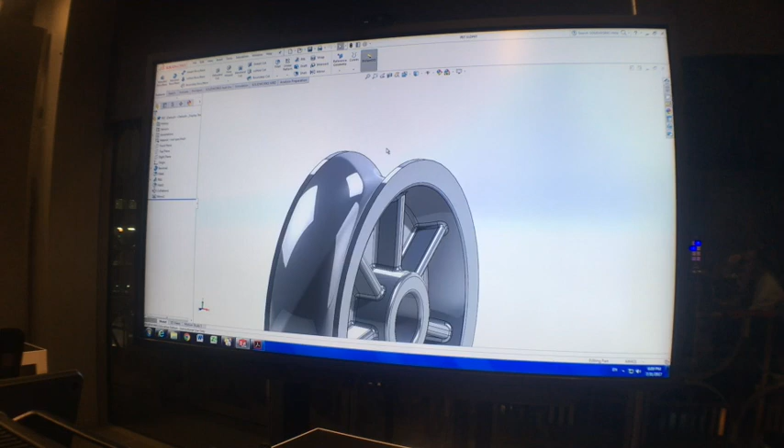So this is the finished part and what we were aiming for. One small detail left off is just a small fillet on these outside edges, 0.5 of a millimetre, but that's not crucial to the overall model. So I'm going to model this from scratch, including the sketch, very quickly.

If you see something on screen you're not sure how to do, yell out and I'll just repeat it, all right?

So start on the front plane, and I'll start with 2 lines and make them for construction. When I'm starting this bottom edge, I'm making sure that it's above that construction line because I want to leave a hole in the middle of my part when I revolve it.

I double click here, that ends that line, and then I can start a new line. And here I'm doing 2 circles, and then pressing trim to trim those away to create my overall shape. Then mirror, and dimension.

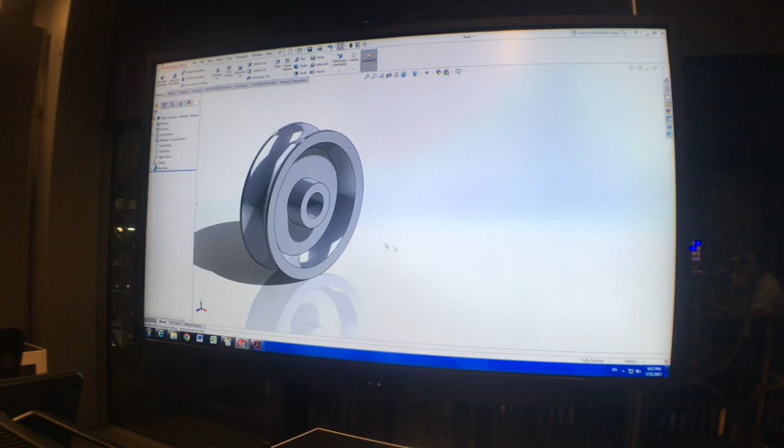Now I'm just going to do this without moving things around in the feature tree, so this is the correct order. So I'm going to fillet these faces.

I'm going to create a rib, which requires just a vertical line. If I want to fully define that, I need to add some dimensions in.

Remember, I want all of your sketches fully defined. So even a sketch like this should be a black line with some dimensions.

Hit the rib feature, 3 millimeters thick, 2-degree draft angle.

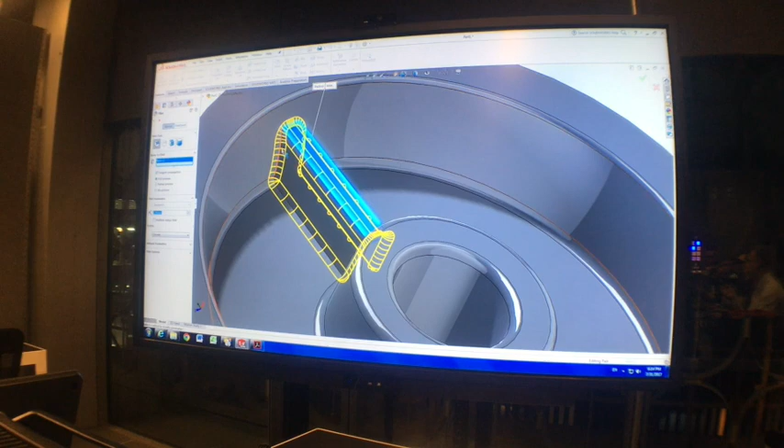Then when I fillet the rib, I'm just selecting this top face. When I select the face, it goes around all the edges of that face, and because of the curves on the shape here, that fillet, which is tangent propagation, propagates all the way around that.

Circular pattern. Pick the axis in the middle. Features is the rib and the fillet. Equal spacing to 7.

Right plane for mirror. Again, rib, fillet, pattern. I also need to check this box here, geometry pattern, to enable this to work. That's it.

Can you go back to the actual sketch of the rib? 9. Okay, cheers.

Any other questions on this one? Based on the responses, I should assume everyone's going to get this 100% right.

There was a radius you put on the outside of the wheel, right? Yeah, that's the fillet. This one here, just on that outside edge, 0.5 of a mil. 0.5, okay.

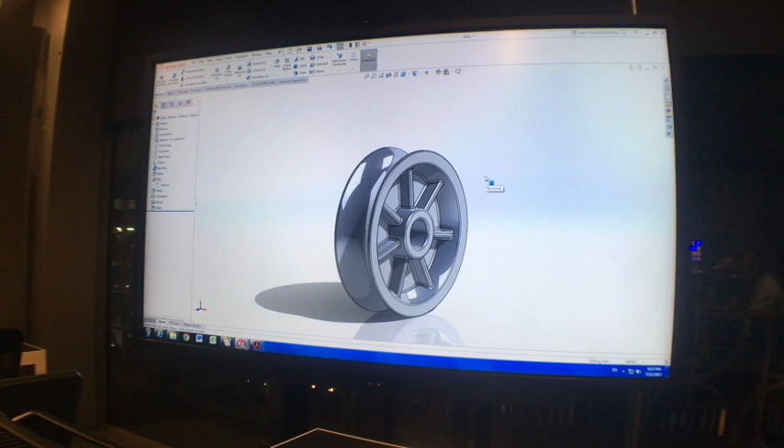So with the mirror, you select the circular pattern. Yeah. So I've seen this come up with a few people, so I'll just talk about that quickly.

When you're doing the circular pattern, what does the geometry pattern tick box affect? Why does that make it magically work? To be honest, I can't explain it. Just do it. Complicated? Yeah, this is very complicated. Google it if you really want to know.

I just want to explain something quickly with the patterns, okay? And it's the same with the mirror. So when I'm doing that circular pattern, you can see here, when I click on that rib, it gives me a preview, and that looks pretty close to what we're doing, right?

If I just tick that one, it's only including the rib feature, it's not including the fillet around the edges as well. You have to manually include that fillet feature here in the features and faces to pattern. So you've got to make sure you select that fillet as well.

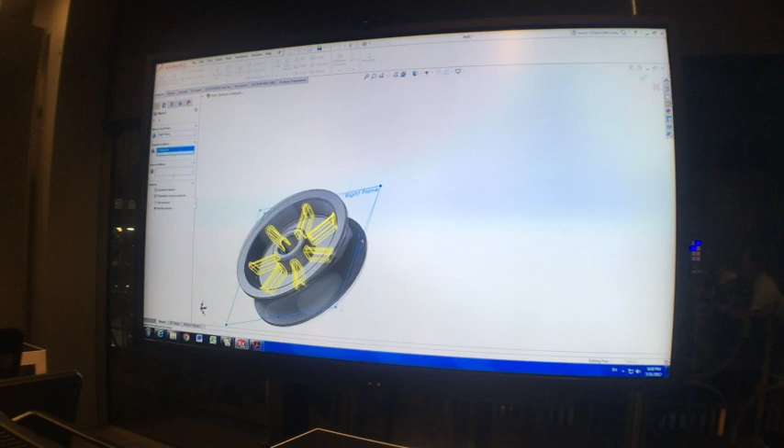It's a similar thing when you do the mirror. So when you do the mirror, all right, if I just select one of those patterned bodies or patterned faces, you can see the preview there, it's showing me the entire pattern, okay?

Now in this case, it's actually worked compared to bits earlier. Typically though, what you should be doing when you're doing that mirror is including the original feature as well. So you'd want to normally include that rib and that fillet as well as the circular pattern. Okay? If you're encountering errors, make sure you've got those 3 selected.

If we were to edit the original fillet and rib having not mirrored them, would that affect the drawing later on? Because you know how you mirrored just the circular pattern and it took everything with it. Is that why we needed to mirror the rib and the fillet as well? Let's test.

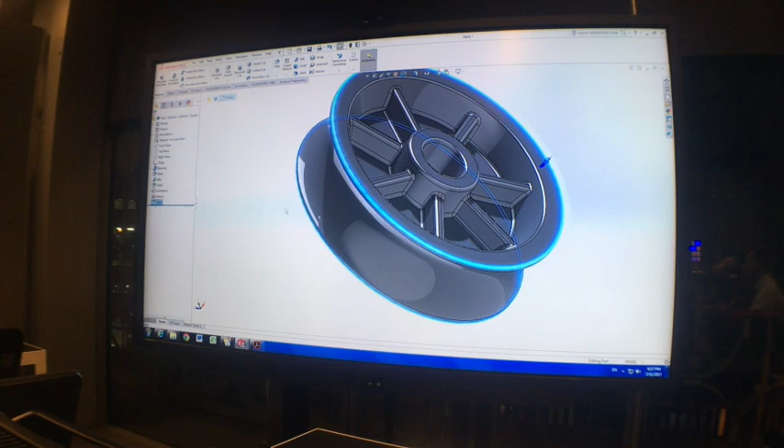Okay, so if we edit, basically what you can see is a mirror, which signifies that when I edit this fillet size, so let's go down to 0.5, that's going to be reflected on the other side, because it's derived from that. So even though it's not included in that mirror feature, you can assume, it's safe to assume that it will be.

Any other questions on this one? 0.45. Very good. 0.5 for what? The one on the outside? That outside one. 0.5.

Okay, so what we're going to do now, once you've done that part, I'd like you just to open all of your parts. Just have them open in SolidWorks. So, a few tricks just to move between files, or basically sorting through your interface, and shortcuts. We'll touch on some things now. When you're working with assemblies, it can be useful to have things open because it just makes it quick to insert. When you start a new assembly and you go insert part, anything that's open will already be there to bring in.

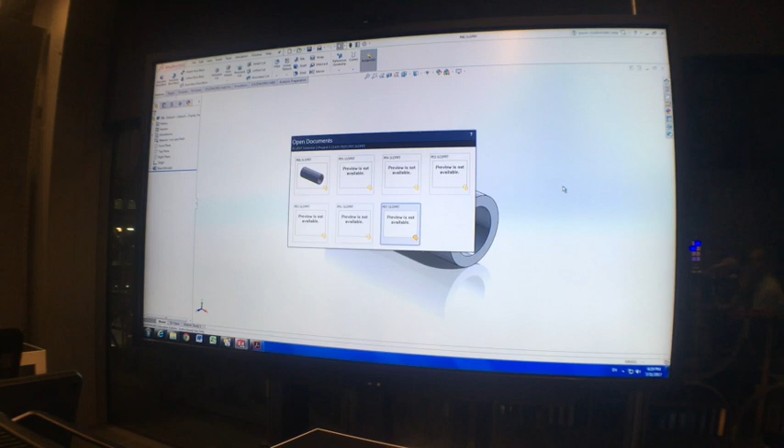So when you have multiple parts open, if you hit Control-Tab on your keyboard and hold down Control, you'll bring up this Open Documents window and you'll be able to cycle through. When you let go of Control, it'll open up that file. So that can be useful for moving between files if you're making changes. You can also, once you've hit Control-Tab and you're still holding the Control key down, just move with your mouse and click on one of those files.

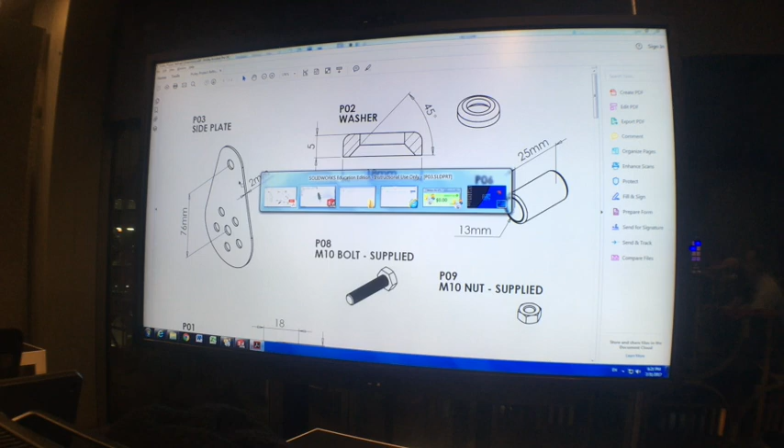So we go to that part, and if you've set up correctly with all your dimensions, there should be some things we can do pretty quickly. So here, that A to B, I can press in there, 76, easy, and the thickness, I can change that to 2. Now the holes, it's a little bit different. I can change this number to 5, but see how it's still at the top? I need to bring that around to the bottom. So for that change, I need to edit the sketch. If you want to edit a sketch that's in a feature, you can click on the feature in the feature tree and see this icon that comes up, edit sketch. You click that, and then you're editing that sketch.

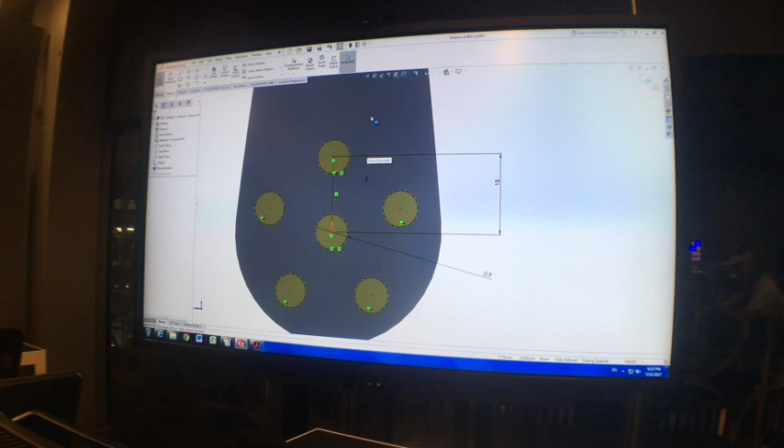Willie? What do I need to do to get that circle to the bottom? I don't remember how I did it last week. I think I got rid of the constraint that made it vertical and then dragged it around to the bottom basically. Yeah, he's spot on. So what's holding that circle up the top there is its dimension here, 15, and also that vertical relation. Now, it should still retain a vertical relation.

There's 2 ways of doing this. The first one is deleting that, moving this around to the bottom, and then adding it back. The other way is to delete that dimension, 15, and then you can actually drag it through and out. Either way, same result, same number of clicks. So you want to move those holes around to get that hole at the bottom. Okay. All right, it's good. Save.

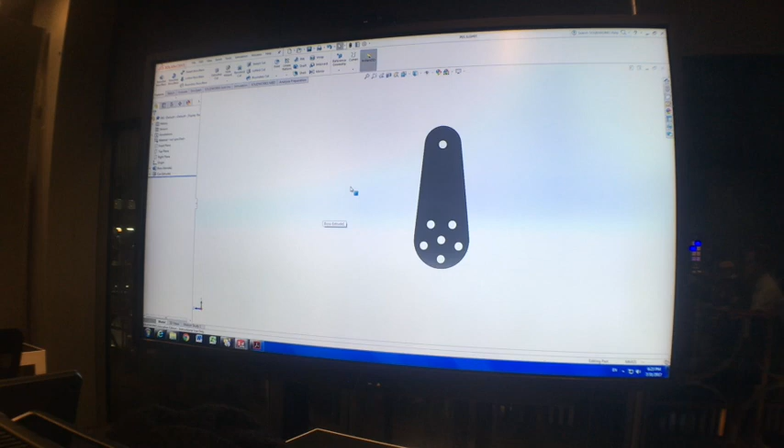Could someone else point out something for me? Chris, while we're on that side plate, the radius of the bottom large circle seems a lot larger. Yeah, you are correct. But I can't find anywhere else on the document a dimension for that. No, it's a good point. Okay, let's make it bigger. Let's go 80. The wheel is 76.

Yeah, you're pretty smart, aren't you? It's good. It's good.

Okay, Zach's made that diameter at the bottom 80. Right now that looks wrong, but I need to update the rest of the proportions. I know the 76 is right here, and we've got the 80 at the bottom right. So perhaps the top might need to be a bit bigger, perhaps the hole spacing needs to be bigger, perhaps the holes themselves need to be bigger. There's a few different things you can do that might affect how it looks.

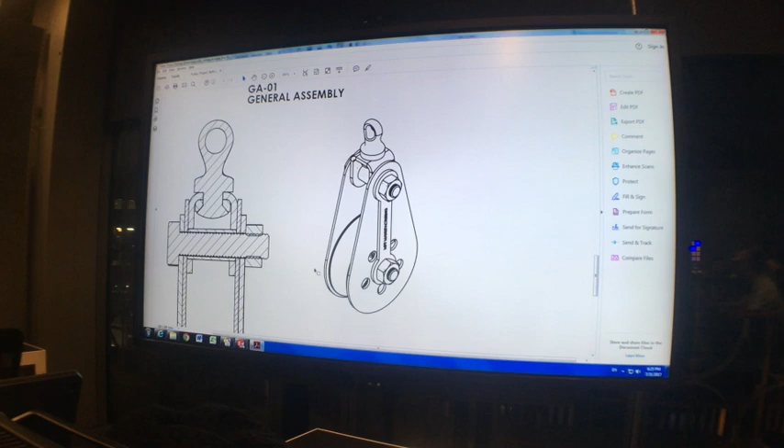The other thing that I think Zach's probably done is had a look here at this, and you can start to see the proportions of one part relative to another. If you know the diameter of the wheel is 76, and that's smaller than the diameter of this part on the outside, then it obviously needs to be bigger than that, doesn't it? Yeah, so it's really good.

Okay, what's next? Someone else? Something that's different, there's a chamfer or this fillet one on the washer. There's a round fillet, and then on the bush there's also, it looks like there's a fillet.

We'll do that one, that's pretty easy. The one on the washer, you're right as well, there is a fillet on that, we'll come back to that one. So the one on this part we'll come back to, leave that for now. But on the bush here, we can add a fillet.

So 1 millimeter outside surface, okay. The other thing on this, it's got a width of 25, so we can update that if you had 30 like me. Save that. All right, anything else?

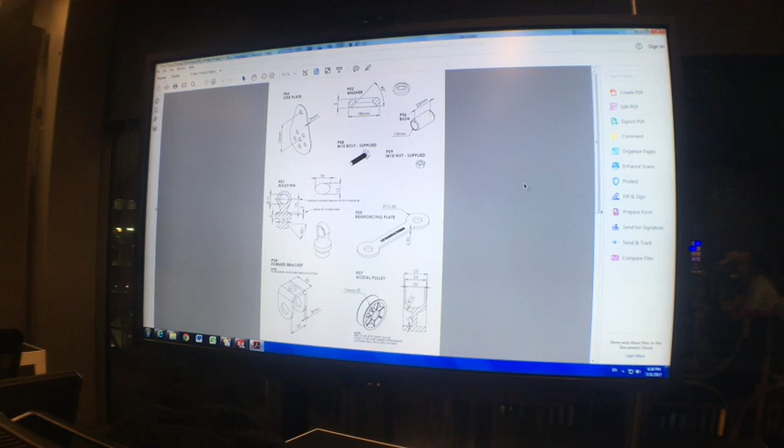All right, the main one that someone should have picked up is that this one's got text cut into it. Not quite off center, on center, but we're going to do that detail now. It's also got this dimension here, 12.5 for that radius and 2.5 for the thickness, so we'll put those in as well.

So that 90, that's changed to 76. Diameter, what did I say? 25, yep. The thickness, 2.5.

Okay, so on this one, what we have is some text engraved, all right, CLB, my initials. When you do yours, you can do your own initials, you can do your own brand name, whatever you want. Just don't do CLB manufacturing - let's see who's listening to my instructions.

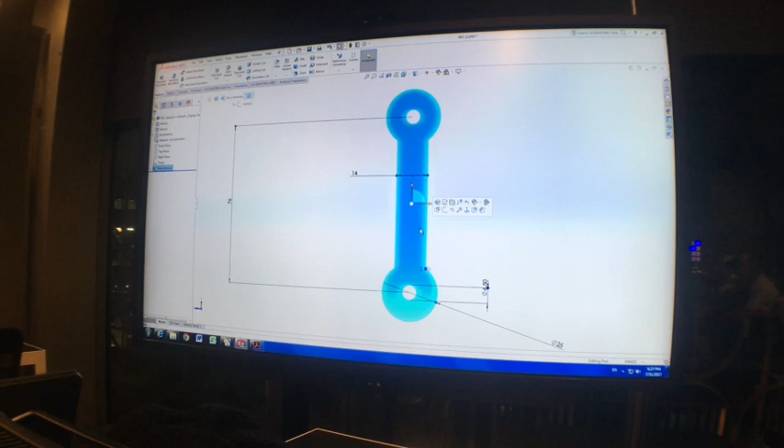So to do that text, it's just a sketch, all right, and there's actually a text tool. So we start a sketch on this face, and the text tool you can see up here says text. I'll show you how that works. So I'll click that text tool, and what happens is, in the text here I can type in, and you can see in my viewport that that text has gone to the origin. By default it will go there.

What it's really good at though is going around curves or edges or lines. So if I wanted to do text around a curve, I can select the curve here, and you can see that text will actually follow that curve. Now you can edit the direction of the text by pressing these buttons - I can flip the side the text is on, I can flip the direction the text is going, I can make the text justified or centered.

So if you're trying to make a clock, for instance, you could just have a circle there and your numbers, and just justify them around a certain arc. So there are easy ways to set those sort of things up.

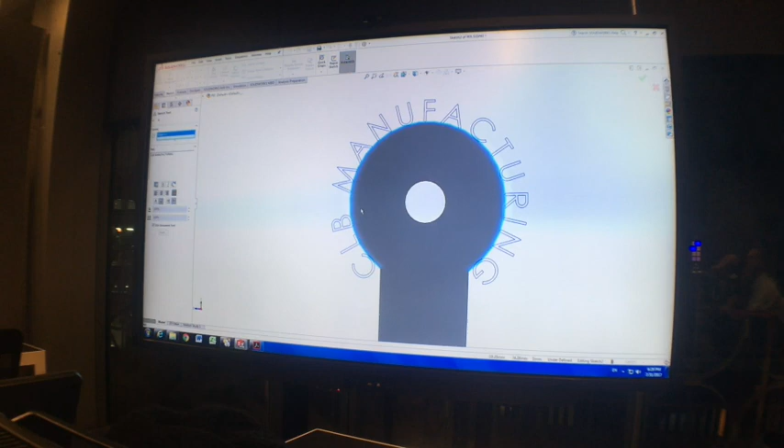What's important to note though, when I have something like this, when I'm using this text, the normal rules apply when you're trying to do your extrude or cut - you don't want lines crossing over each other. The one thing with text is you actually can't trim them, so even though it's blue lines there, you can't actually trim away like you could in Illustrator, those little sections. So if you are using text, you need to make sure that there's no overlaps, to use them properly when you want to do a split line or a cut or an extrude.

Now we want to have this in the middle of our part. What it doesn't say here, but what I'll tell you is the text is 3 millimeters high, so we want it centered in our part and 3 millimeters high. I'm just going to press the tick on that one, leave it for a second - to come back and edit it, I'll double click it later, but just press the tick and it'll stay there. I'm going to add a construction line up the middle.

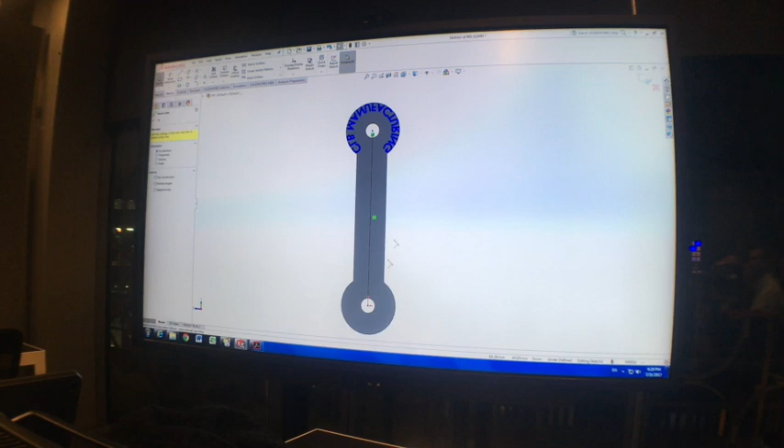I'm just going to add another construction line, which goes from here to here, next to it. And what I can do here is put a dimension between those that's 1.8 millimeters, which will give me a baseline to put my text on.

Alternatively, you can do this without the line at the middle and just dimension it from the origin.

So once I've got a curve there, I can double click my text, and where I've got the edge selected here, I can delete that and select this new line. Just going to center my text, flip it the direction so it's around the right way.

And then to change the font or the height of the text, I want to uncheck this box which says use document font. Press the font button. And then here, you can choose any font that's on the system. The only thing you need to do is make sure that it's 3 millimeters in height.

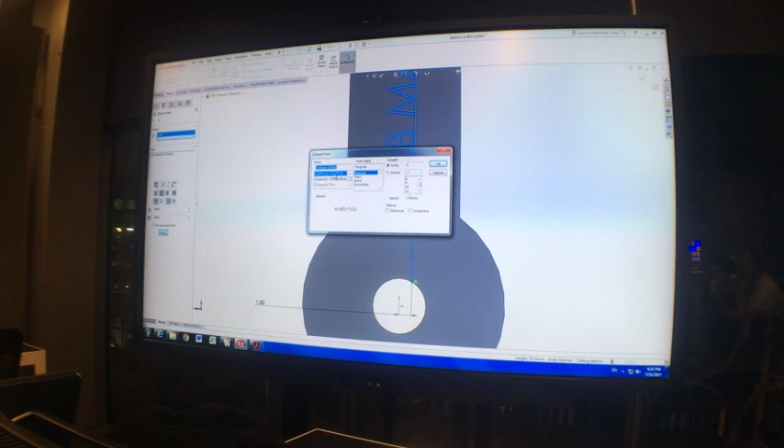So you can use any font you want, so long as there's no overlapping of letters. When you're happy, press OK.

And then go features, extruded cut. If it works, you should get the yellow preview. And when you cut, just make the cut 0.2 of a millimeter, like an engraving. Press OK.

And there is your detail. Now what you can see there, mine hasn't included that L, so I'm going to have to change the font. Go and edit the sketch. There's no particular reason why that one hasn't worked, but change it anyway.

Alright, there we go. And save.

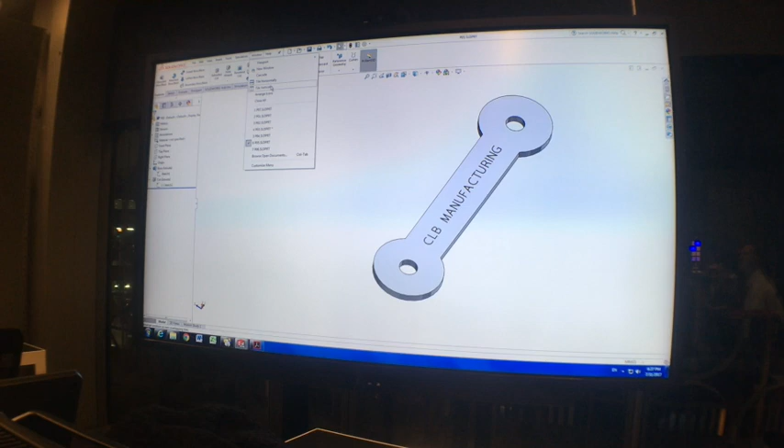We'll keep going now with some assembly stuff. So one of those other tools, once you have your parts open, is you can click on window and tile, and you can either tile horizontally or vertically, but that will show you all of your parts as well. It's not a very useful way of actually working, but you can then visualize what you've got open at the time.

If you want to increase the size of those, and let's say there are only 4 parts you're working on, you can minimize some, and once they're minimized and you press tile, it will just tile the remaining ones. Once you go full screen again, the rest will all go back to full screen. But the others, they'll remain minimized until you go through and cycle, get them all back to maximize.

There's also this button here at the top right of the viewport. Click to tile to the right or the left, where you can basically put one file, one part just to the right, and it'll show the other 2. So there's a few different ways you can play around.

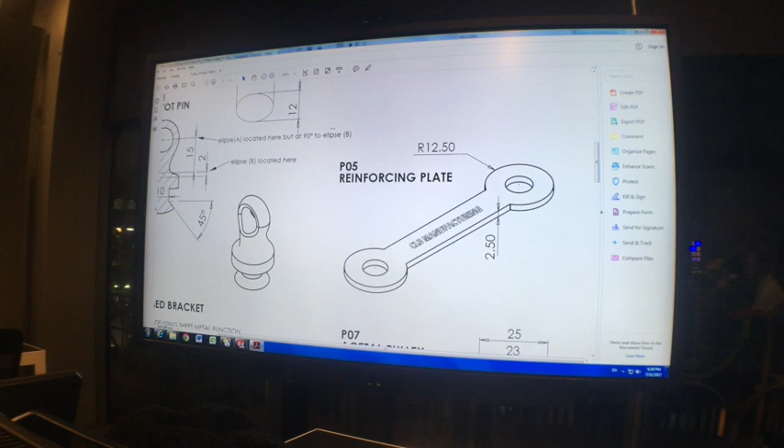So we're going to start with our assembly now. Have a look at our drawing here. We're going to start with this sub-assembly, which has those parts, 1, 2 and 4. And then we're going to create a new assembly and put that sub-assembly into the new one. But I want to make sure we all get the basics right first, with just the simple assembly to start.

When we're starting our assemblies, you always want to consider what's going to be the easiest way to get everything in there and aligned properly. So you typically want to start with something that's central to your assembly. If you're assembling a car, you wouldn't start assembling the whole car with a tyre and working out from there. You start with a central part, which might be the main chassis. So let's start with something central.

In this case, we'll use this formed bracket as our first part because it's symmetrical, right down the middle. It's got holes here on the sides. It's got a hole on the top for the pivot pin and a washer to align it to, and some flat faces here for later on mating to these side plates once it's in the general assembly. So that'll be our first part.

So what we're going to do to start your assemblies, there's two ways. You can go File, Make Assembly from Part, or you can go File, New, and Assembly. Press OK.

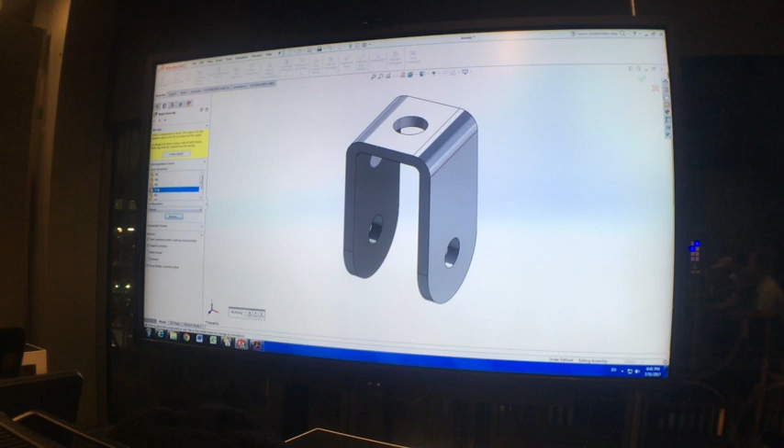As I said earlier, when you have your parts open in SolidWorks, you can see them here as parts ready for you to insert into that assembly. If you have nothing open, just press Browse and you can browse for your files, or you can click and drag straight from Windows Explorer into SolidWorks Assembly to add parts. We're going to do it the normal way here, and I'll explain a couple of things about starting the assembly and how things can be different.

So the first one I'm going to do, I selected part 4, and I'm going to press the tick as the first one. I'm going to do 2 more. I'm going to do number 4 again, but this time I'm going to just drop it on the screen. I'll just stick with those 2 for now.

Alright, so the very first part you put into an assembly will have this F icon next to it. In the feature tree you'll have an F in brackets. That means it's fixed in place, so it's pretty much locked into position.

Any other part after that that you bring in will be floating. So this one is the first one, it's fixed. If I try and move it, I get a note that says the selected component is fixed, it cannot be moved. This one, the second one, is floating - I can move this anywhere. That has that minus sign next to it in the feature tree, and that minus sign signifies that it's underdefined.

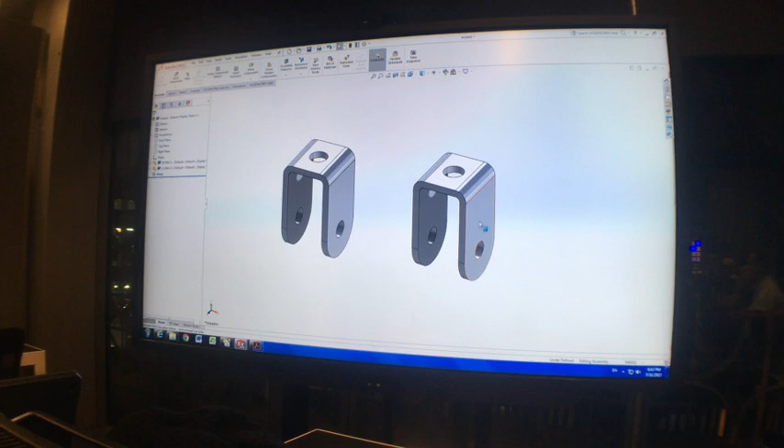So you can float a fixed part by right-clicking and then selecting float, and then I can move that first one around. You can fix a part by right-clicking and going fix. Now, our aim is not to fix or float anything, but to fully define everything using mates.

Now, when you bring a part in, I'm just going to insert a third part now. When I select that part 4 and I hover over the tick here and press the tick, that part's now fixed again. But what's actually happened is that part has been inserted to match the planes of the part with the planes of the assembly. So this part, which has a front, top and right plane, is now matching the front, top and right plane of the assembly. And that sort of thing is key for how we set up our first parts.

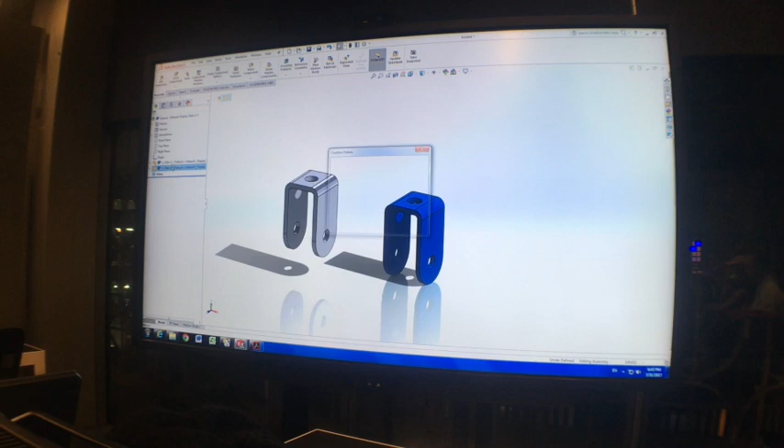Now, when you're in assembly, you can delete parts by selecting them and pressing delete on the keyboard and enter. So the correct way to set up your assembly: bring in your first part, make sure it's floating so you can move it around. And to get used to mates and to set things up properly, what we do with this first part is mate the planes of this part to the planes of the assembly.

So when you mate, there's a couple of ways of doing it. You've got the mate icon here, which is the paperclip on the top left. My preferred method for mating planes is to select them in the feature tree by holding Control and then hitting the mate icon, and that will bring them together. Once they've added that mate here, and it's a coincident mate, so those two are touching, I can press the tick.

That mate is added down here. If I want to edit it, I can click it and change things. But if I want to keep going, I can now just select my next planes, which is going to be top and top, and I can press the tick on this shortcut menu. And then right and right, tick. Those three mates there ready to go. To add, press the tick here to go OK.

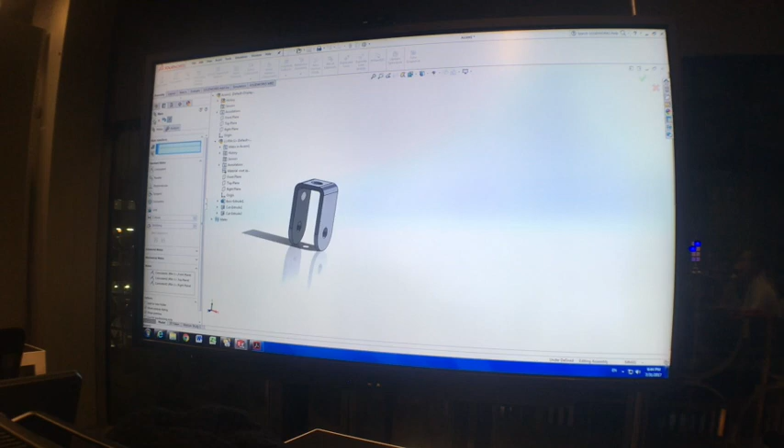And now you'll see there's no F, there's no minus sign - this part is fully defined. So if I try and drag that, I can't. At the bottom of my screen, it says fully defined as well, telling me my assembly is fully defined.

Alright, so that's the correct way you get your first part in. I'll show you the next two parts, and then I'll give you a chance to have a look at it yourselves. So insert component, I'm going to bring in part 1 and part 2.

The other way to do mates, once you've got your parts floating, is to hit the mate icon and click on the parts you want to join together. Here I'm lining up the inside face of this washer and the outside of this pivot pin's circular area. Even though it's the outside of this part and the inside face of that, it doesn't matter since they're both circular and share the same axis. I could even select the outside face here because that's circular too. It doesn't need to be the inside and outside of something when you mate it together.

So that type of mate is a concentric mate. Press OK. You can also press lock rotation sometimes, if you don't want something to twist around, you can press that to stop it twisting. For this project, just leave that unlocked. Press the tick.

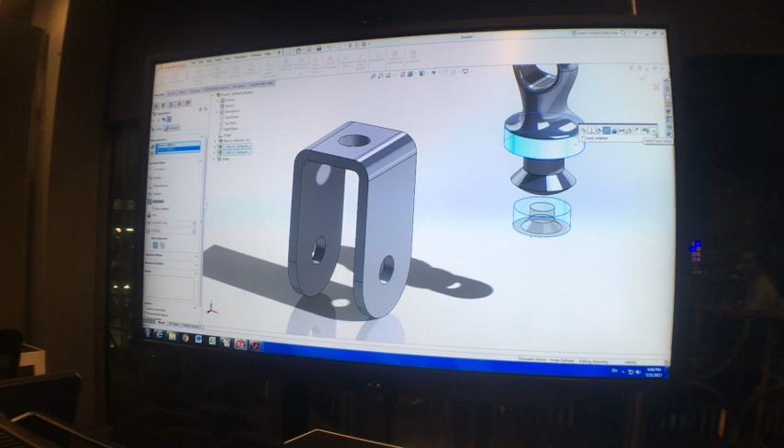Then I'm going to mate the top surface of the fork bracket and the underside surface of the pivot pin. Inside circle, outside, underneath, top, and then press the tick.

Alright, let's move those into position. They're still underdefined - I can tell because now I can drag them, so I can actually rotate them. It's the same with the washer, although it's a bit harder to see, but that's rotating as well.

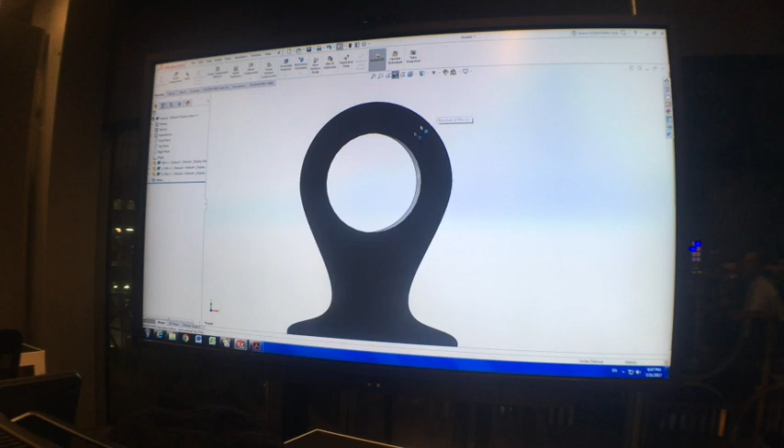We want everything to be fully defined. One reason is in our next project we're going to do some section views, some drawings to explain everything. If you have this twisted, not perfectly straight, when you do a section view, you're going to get a bit of an off shape up here - it's not going to be symmetrical. That can cause confusion for manufacturers or issues when communicating that detail to your suppliers. So that's one reason why we're going to try and get this stuff fully defined and lined up properly, so it's nice and straight.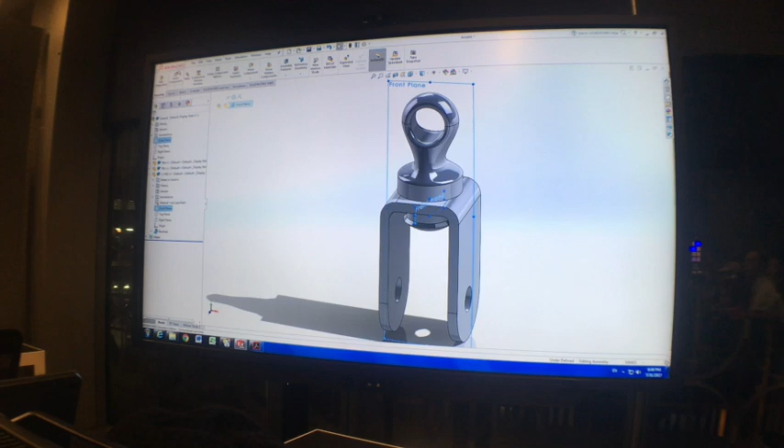With this part, there's no flat faces that I can get it to mate to, but what I can do is maximize that part, have a look at the planes, and I can see the front plane there. I can select that front plane, hit mate, then select this front face of the form bracket, and that'll add a parallel mate so it lines them up and makes sure they're straight. Press the tick - now you can see that part's fully defined, so it's not going to twist anymore. I'll do the same for the washer, front plane and front face. Tick, okay, and now that's a fully defined assembly.

Alright, last thing, save that. Rebuilding, that's fine. When you save assembly files it's different to part files - they've got a different file extension. Save it in the same folder with all the other parts, and you want to save this as subassembly 01, SA01, and then in the description, subassembly. Save. And that's done.

I'm just going to show you how to start the general assembly, and then I'll leave it. So now we've got that one, we want to make an assembly from this. We're going to bring that in as our first part of the main assembly. I'm going to float that, and do the same thing with the planes - front, top, and right planes mated together to get it fully defined.

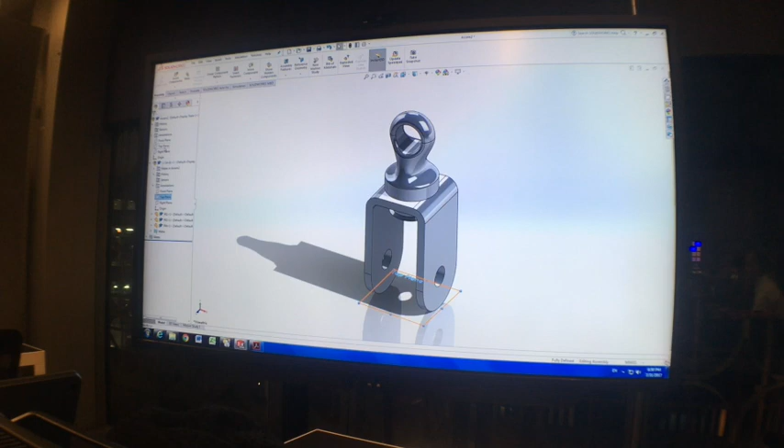And then it's in this one that I would add in my other parts. So my part 3, part 5, bring in part 6, and part 7, the wheel.

In your assemblies you can insert multiple parts the same way you've just done, or you can create copies. If I want to copy this part because I want to make 2, I can hold Control, click and drag, and that makes a copy. The other thing you can do is select a part, press Control C and Control V, which creates a copy. The copy's in exactly the same spot though, so if the part's fully mated, it can be hard to move it out of position because there's another part on top of it.

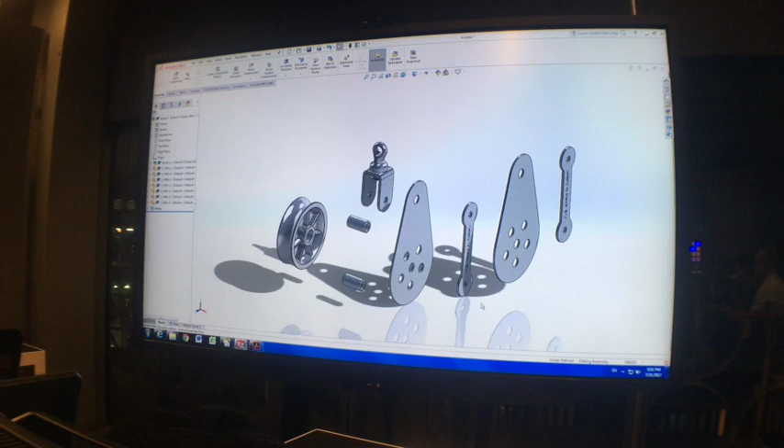But that's all of the parts there. So we'll leave it there for now, let you play around with those, get the sub-assembly right first, and then create your general assembly from that. Next we'll come back to look at how to make these together and then add in the nuts and bolts - that'll be the next thing we'll talk about.

It looks like everyone's making a pretty good start on those assemblies. So we're going to keep that going now and show you a few more tricks with doing those, and a few different ways of using the assembly and looking at it and its parts. I'm going to very quickly add the remaining mates for this one.

As we go, I'll show you a few of the different sorts of mates we can use. What I like to do when I mate is do all the basic ones first, so all the concentric mates and coincident mates are the easy ones to get done early.

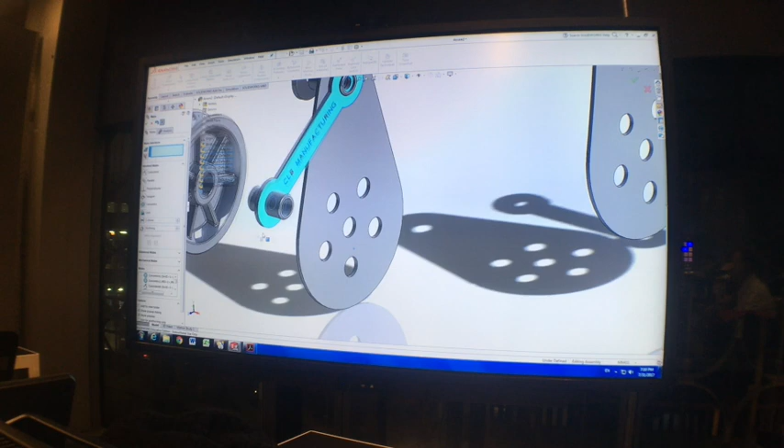Now, when mating parts, if you click and hold your mouse, you can select and move a part without selecting it to actually mate something. That can make it easy to add some mates, like those concentric ones, to get parts in the right position.

Now this is a bit of a tricky one here. The text of this part's on the opposite side. The way to do it, when you do your concentric mate, see these arrows here - flip mate alignment - press that button and that'll flip it to the other side.

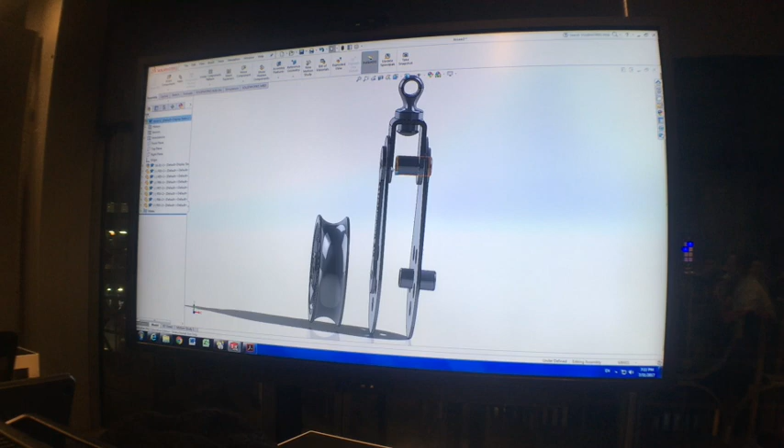So that's all the basic ones. The ones I've got left are a little bit of swinging parts, and the position of the wheel and the bushes.

First, the swinging parts - you just have to find a flat face to match them up. Firstly, those two center parts are going to match there. Then I can match this face, which is going to be vertical, with this face, and they'll be parallel. That's going to stop the swinging for all of those. So you can see now these are both fully defined.

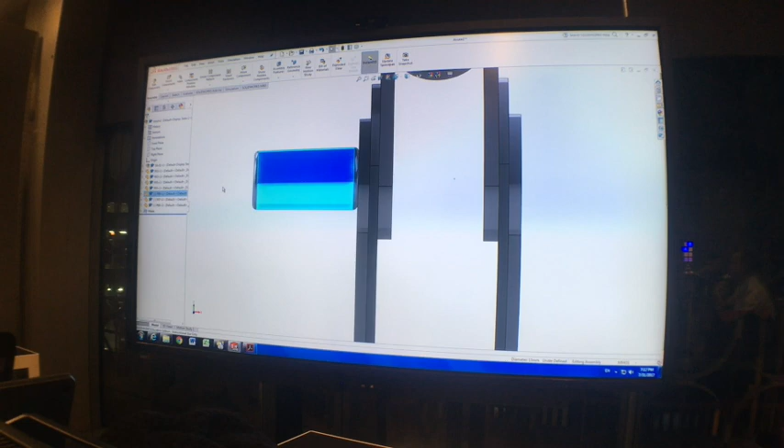For the bush, I could mate that to one side if the gap was correct and the size was correct. Another way of doing it - and this is why we often extrude things mid-plane - is I can use the right plane that's in the middle of that part, hold control, select the right plane of the assembly to get it mated in the middle. That way, no matter what size it is, it's always going to be central.

I'll do the same with the one at the bottom, and you do the same thing with the wheel. Right plane, get in the right position.

So then those parts which are underdefined, it's just about rotating. You can see the front plane there - if I show that, show plane, you can see when I move this around that front plane's moving. Or I can mate that front plane and this face here to stop it rotating. Front, that one. And same for the wheel.

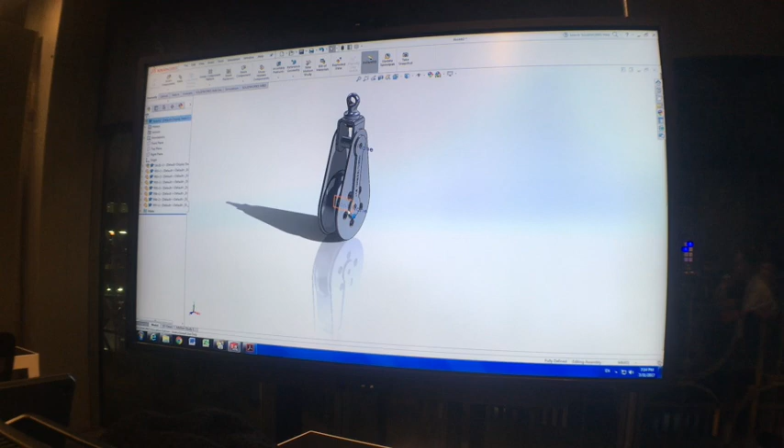Alright, and now my assembly is fully defined. So that's all the mates done. Save - if you haven't saved yet, it's probably a good idea. Get it done.

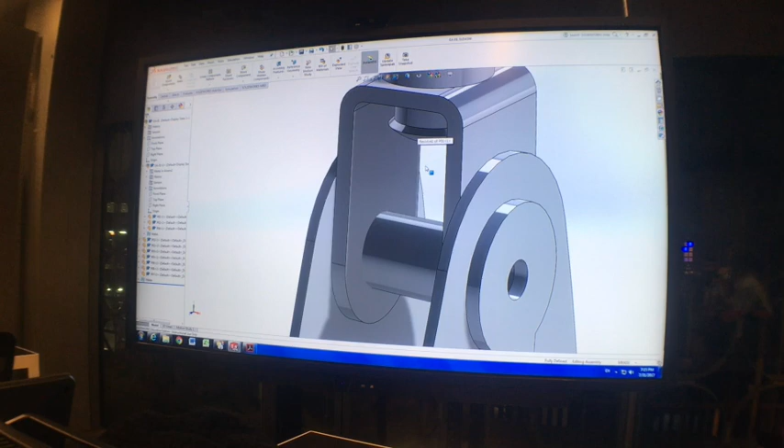So one of the good things with the assembly is the ability to edit your parts when you're in the assembly - I don't need to go out to that part to make the change, I can do it inside here. To do that, I'm going to select that part and select this button here, Edit Component, and that takes me from assembly mode into part mode.

Now I'm in part mode - it's just like you're in that part file. I can click on this and click on the hole size and see the hole, and I can change my measurement and see how it edits within the assembly, and you can see now I've got that clearance. When I'm done, hit Edit Component again to get out, and you're back in assembly mode.

Alright, so that was one of the interfering parts.

There's a couple more that aren't quite right. One of the things you'll need to do before we submit - and we'll be submitting during next week's class, probably halfway through - is a bit of spot the difference. The way to do that is to go to an isometric view.

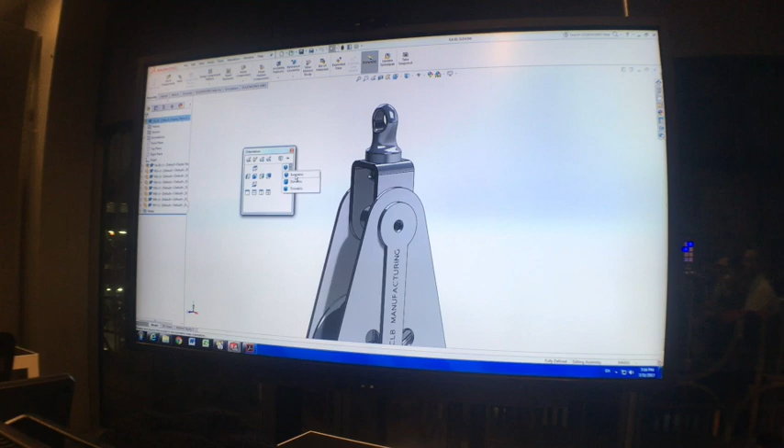We've got all the front, top, side views here, but you've also got isometric, dimetric and trimetric. If you go to the isometric view and just zoom out with your mouse until you get on the side here, you can bring up this PDF and this drawing view, put that on the side of your screen, get that view up, and try to pick out the differences between what you've modelled and what that image is showing.

We don't have the nuts and bolts yet, we'll put that in soon, but there's a few things you could probably point out straight away that are incorrect dimensions somewhere. So long as all your other dimensions are correct with your parts, as far as you've matched up with everything in this file, what's left is for you to determine based on what you can see here.

So we're starting to build on that attention to detail aspect. I'm not going to tell you all the answers - this is where you need to have a look for yourself and try to work out what size some things need to be. We'll touch on that a bit more again next week.

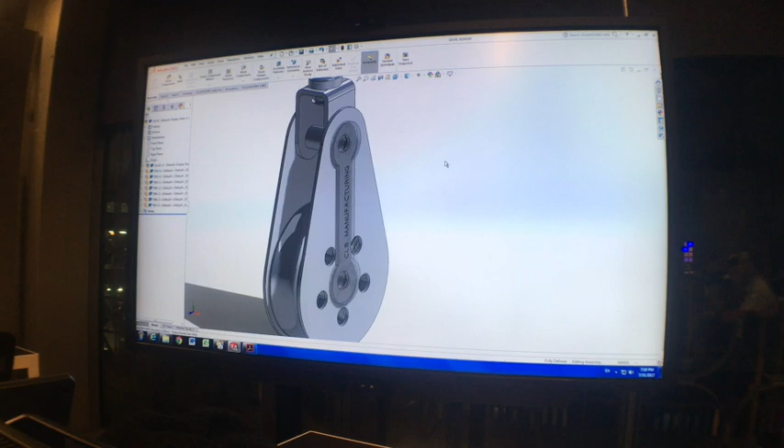So just some other useful tools in the assembly - you can hide and make parts transparent. To make a part transparent, you can click on it here or click on it in the view in the feature tree. You can see the icon here, change transparency, and that'll make that part transparent.

Or you can hide parts totally. To do that, click on the part again and click hide, and that will hide them. You can see that they're hidden in the feature tree - they've got outlines next to them.

To turn them back, you just click those icons again for transparency, or here to show.

Now when something's transparent, you can't click on it in the viewport unless it's the only thing you can see between you and the background. So I can select it here because there's nothing behind it, but when I'm here, I can't select it - unless you hold down the Shift key. Shift lets you select things that are transparent or clear, no matter what's behind them.

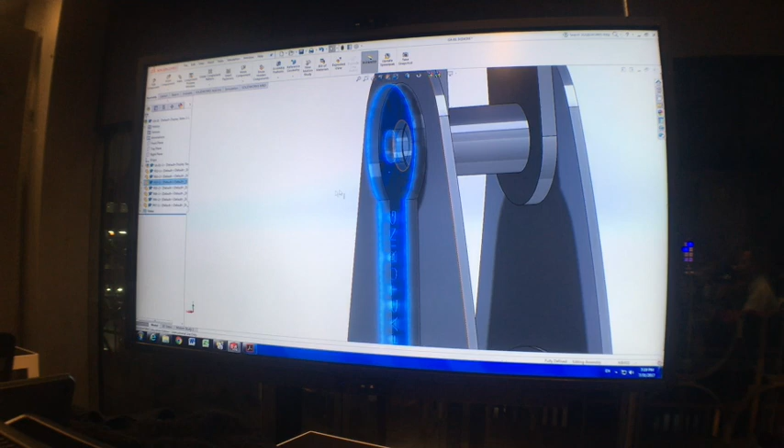So now we're going to add the nuts and bolts. SolidWorks has built into it something called the toolbox. That can be found in the design library - on the side of the screen, there's a design library icon you can click, and you can see the toolbox.

And the toolbox is like a plugin - you've got to turn it on for it to activate. It's called an add-in. SolidWorks plugins are called add-ins, so you click add-in now and that'll turn it on.

Now the toolbox is a collection of parts that you can use in your assemblies, and they're typically common parts like nuts and bolts. Depending on the types of standards you want to use, there's going to be different options - ANSI inch and metric, Australian standards, British, international, there's some structural stuff like steel beams. There's a lot of different things there - have a look through them and just acquaint yourself with what's there.

We're just looking for, in our case, I think it's shown over here somewhere, an M10 bolt and an M10 nut. And the length of the bolt should be 45 millimeters.

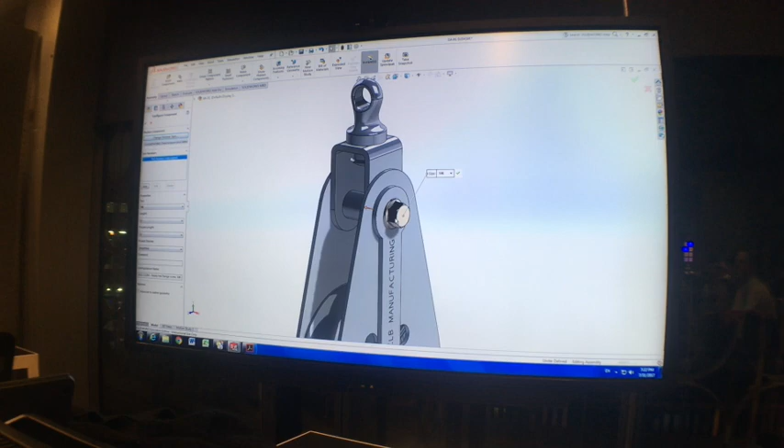The easiest way to do that is to click and drag that bolt and drag it over a hole in your assembly. Now, even though that note on screen says there's no matching size for this component, it looks like it might fit, so I'm going to let go of the mouse, and it's creating that part. Now, at the moment it's got it as M6. What it's doing is sizing the bolt to match the hole.

Problem is, my hole sizes are wrong. I'm going to press escape to cancel that, and edit these parts to fix up the hole size. Because they're M10 nuts and bolts, that means my holes need to be at least 10 millimeters or bigger to allow for some clearance, so I'm going to make them 10.2. Make sure both my side plate and reinforcing plate have the same size holes.

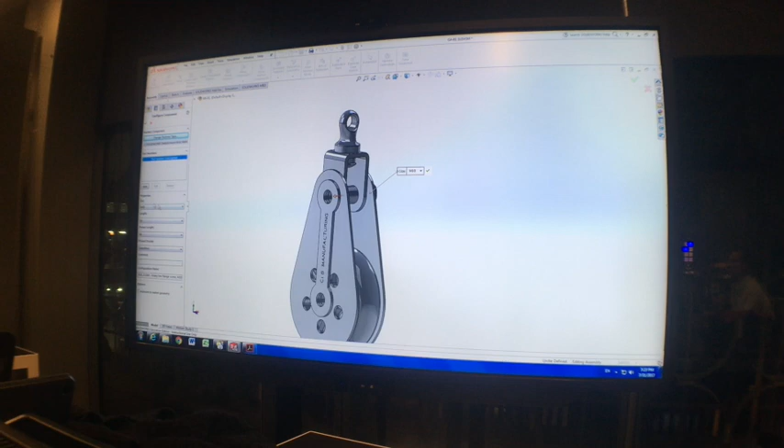And we'll try again. Alright, now it still says there's no matching size, but I think we'll be okay, so I'll let go of the mouse. So M10 is correct. On the side of the screen here in the properties, I can now select the length, go down to 45.

Thread length, so the threads can go part way or all the way. I'm just going to leave it at 26. And thread display - a simplified thread display is basically none, or you can go cosmetic, and it's just going to show like a graphic on the outside, or you can go schematic, and it'll actually show a cut done into that bolt. This is not a proper thread though - a proper thread would be a bit more like a spiral, and it would actually thread onto something. This is just a cut, which shows a bit of a pattern along that edge.

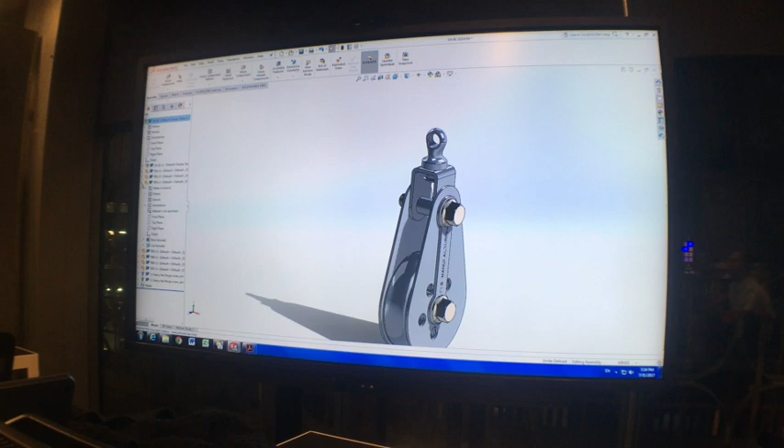But when I'm done, press the tick, and it'll now let me add another copy of that part on another hole. And when I'm done there, press the cross. What it's done when I've brought those parts in, it's actually added mates for me automatically. So not only is it sized correctly to the hole, but it's also added a coincident and a concentric mate around that hole position. To finish that off, I just want to fully define that by grabbing one of these faces and just making it parallel to stop it rotating.

Alright, so that worked pretty well. I'm going to do the same thing now with a nut. So the alternative way of doing this, if it doesn't work when you click and drag for whatever reason, is you can right click on the part and press create part. And it's going to open up in a new file, and in that file you can do the same thing - so just standalone, you can create your part, press the tick. Now that's created it, and if I press Control Tab you can see it here.

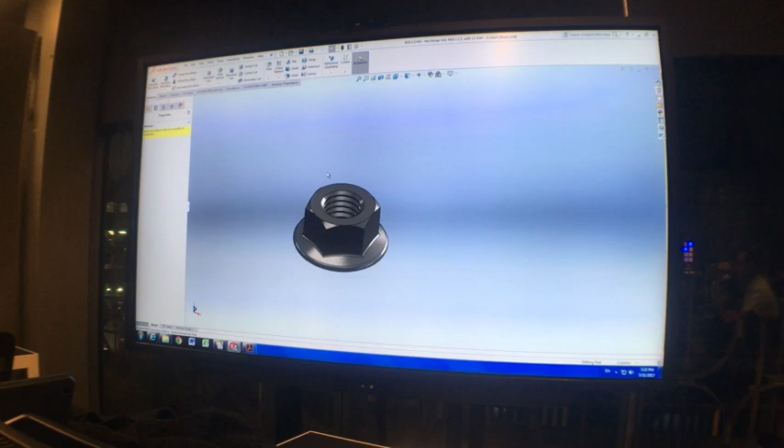Once it's created, I can then insert that into my assembly, and with the nuts they'll do a similar thing like the bolts - they'll automatically mate, you can get your mouse in the right position, to the end of that bolt or that end surface. There we go. To finish off, just going to mate those, make sure they are fully defined. So select that face, that plane. And there we go.

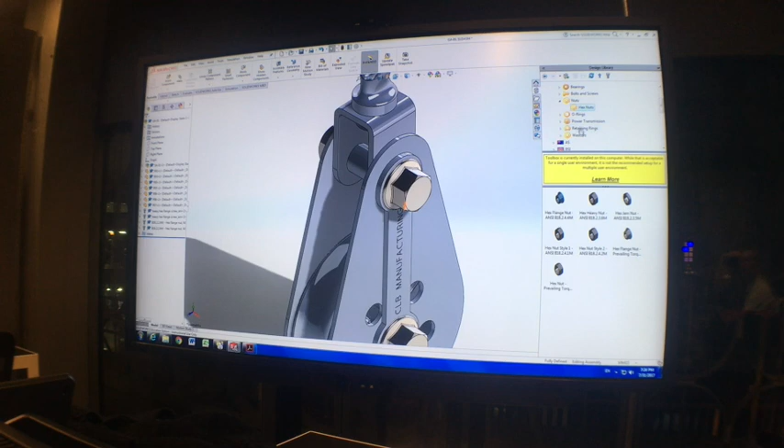Any questions? Pretty handy tool. Sure saves us having to model them as well. So in your own time, have a look through - you can see all the different types of parts there are in here for different uses.

Now, what we want to do with ours, these parts, and where you can encounter trouble in the toolbox when you're on a server - it's fine now, but when I save this file, close it and reopen it later, I might lose those parts. I might lose the reference or a link to them. I don't want to demo that right now. We'll probably see that happen next week in class.

Okay guys, really good progress. I'm going to touch on a few things now which are the sort of things that can come up when you're learning this stuff. So everything that I've done on screen and for the demo so far has sort of just been doing it perfectly, but as you're learning, you're going to make mistakes and it's going to cause some problems. All right, so I want to try and simulate some of those so you can sort of see what some of the possibilities are. So to do that, I'm just going to start a completely new assembly and try and do some of those mistakes. Let's see what we can do.

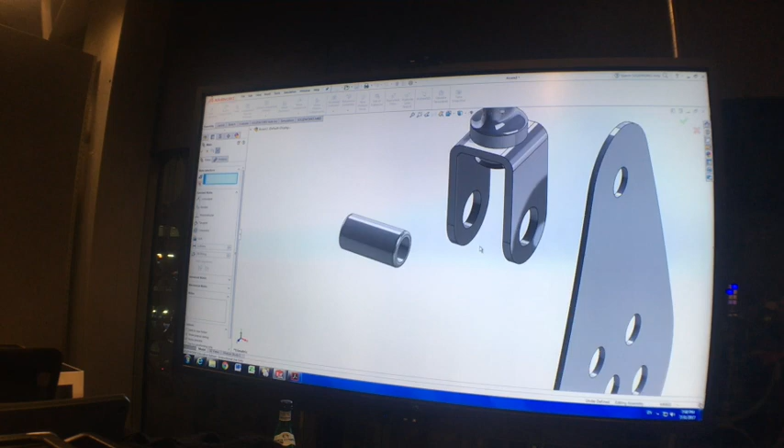Often I find that the problems that people have when they're doing their mates is because they've accidentally clicked on the wrong edges or faces or type of mates. And then when they do the correct one, they're unable to because of what they've already done to begin with. And what they've done to begin with might just be a very small mistake, but it's preventing them from getting the right one done.

So here's a bit of an example. So I want to make this hole and this one concentric. Now, that looked like it worked, but I'm not sure. I'll try again. Press concentric. I get this issue here, mate. The components cannot be moved to a position which satisfies this mate. Cylinders are not concentric. Well, I'm trying to make them concentric. Distance between cylinders is 22.2, blah, blah.

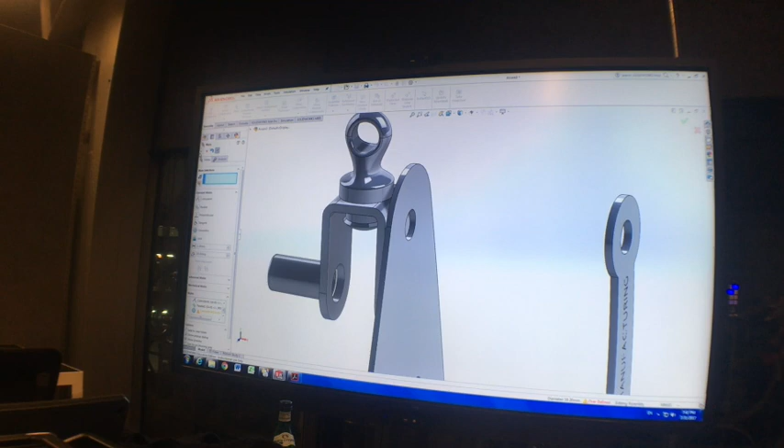I'm going to press the tick and just try and add it anyway. Okay, press OK. Otherwise I might add, I want to get this face to match this face. So the sort of errors that you get in assemblies typically look like this. So in my viewport, you can see there's one part that's red and one that's brown or yellow. And in my mates, there's a few red and yellow errors.

Another one that I've seen a lot already today is this one. Right. So the lock mate. So a lock mate is basically selecting two parts and locking them in place where they are together. But there's no reference, there's no coincident or concentric or parallel, they're just locked in position. So that mate's going to cause you a bunch of errors. So if you have any of those in your mates folder, just select them and delete them. Right, so to delete a mate, just select it, press delete on your keyboard and enter, and it'll remove it.

Now you might get this pop up from time to time as well. It's a summary box. It's showing you the errors and what's happening, whether it's a warning or an error, what the feature is, and the description of it. Now, typically in your assembly, it's going to be all about mates, and the description will be it's over-defining the assembly, or it can't be worked out.

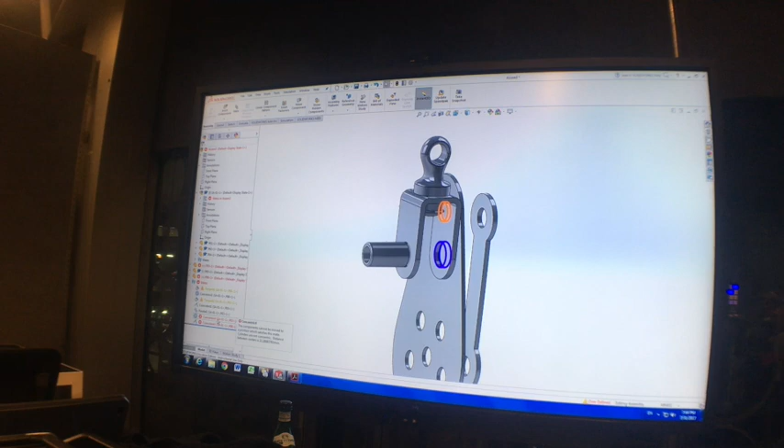So if we have a look at our mates, you can see I've got these tangent ones here. All right, they're the ones that I've added incorrectly. And then these concentric ones, coincident, they're marked as red, but they're actually correct mates. Right? But because I've added them last, SolidWorks is saying, oh no, they're the ones that it thinks are wrong. Right? But these tangent ones are wrong.

So a tangent one is done tangent between this face here, this circular face, and this flat face. So I don't want that. Delete. Okay. That's one step done. Next one, another tangent mate here. So this tangent mate, this face to this curve, is preventing these two circles from being concentric.

I delete this tangent mate, and once I just click that one, it's sort of updated. Okay, and now that's got that concentric mate there. All right, so once you clear those mates that have errors, you're able to then go back and add the other correct mates that you actually need.

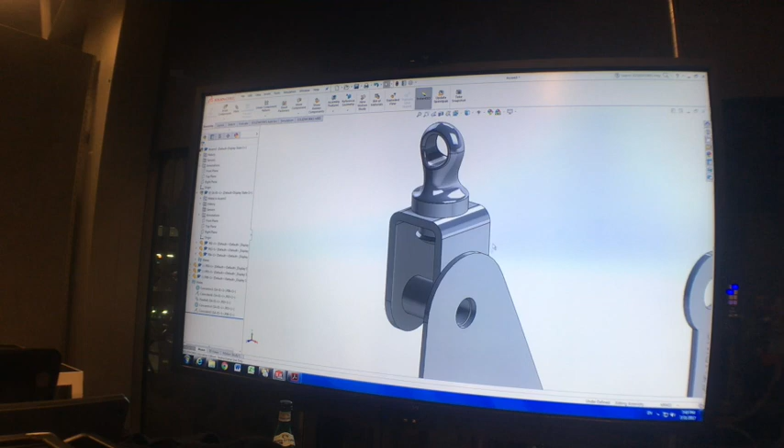The other thing that can happen is that changing your parts can affect your mates as well. So this part here and this one, they have a concentric mate, as you can see there. If I go and edit this part, and edit this sketch, and delete this circle, and replace it with another circle which is exactly the same, 13.2 - okay, I haven't really changed anything.

And we'll see how SolidWorks reacts to it. Yeah, I need to do a better example. Right, let's change that to a hexagon.

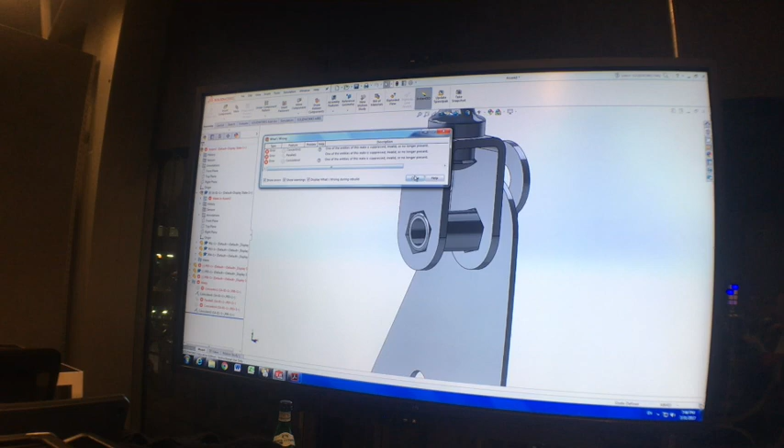And I still have the cut there, but obviously now that circle relation is gone. So that means these mates here, the concentric ones, it's now suppressed those because the hole that concentric mate was referencing between those two parts is no longer in our part. It's no longer in our file, so it doesn't know what it's supposed to be referencing, so it's gone big red error. You know what's going on here - it can't work it out.

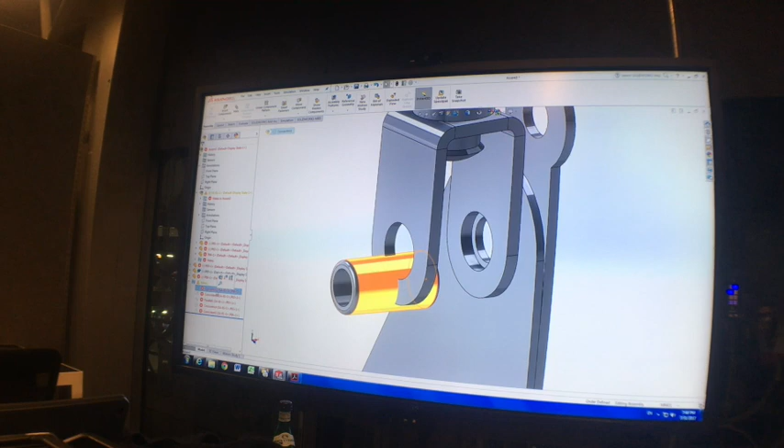In this case, these mates now, they don't need to be deleted, but you need to edit them and update them. So to do that, you would edit this mate, and you can see here, there's a reference missing - so it's missing a face. If you're lucky, it'll highlight for you where that missing face was, and you can just click on that face, and it'll add that mate back and turn it back on. Okay, so there are different ways that you can deal with those errors.

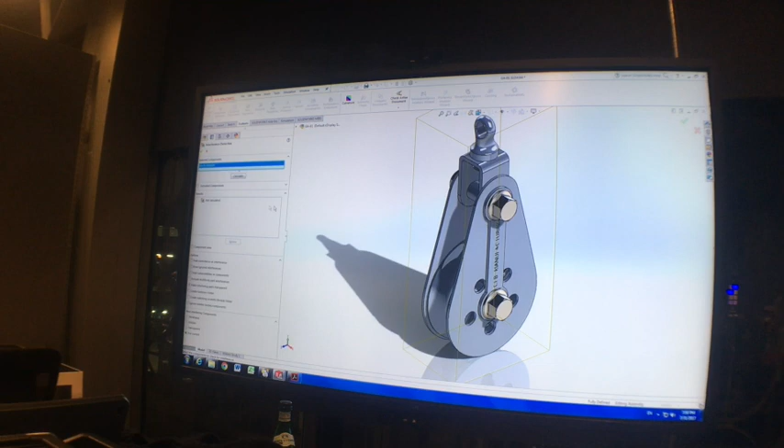The first thing we're going to do is what's called interference detection. So you typically do this once you've done all your mates, because you know everything's in the right position. It's now more about your design - are things the correct dimensions? So click on Evaluate at the top, then click Interference Detection, and it's going to select the entire assembly. You can, if you want to, do interference detection between just 2 or 3 parts, just by selecting those and then hitting interference detection. But we're going to do it over the whole assembly at once because it's a pretty simple assembly. Press Calculate.

And it's going to bring up or identify wherever you have interference in your assembly, and you can see that in the results. And you can see I've got quite a few there, maybe 20 or 30 interferences. And you can cycle through them. So when you click on them, they'll identify in red in the viewport where those interferences are. The other thing, if you click on the arrow, it'll show you with those 2 parts. So this is between part 6 and part 8.

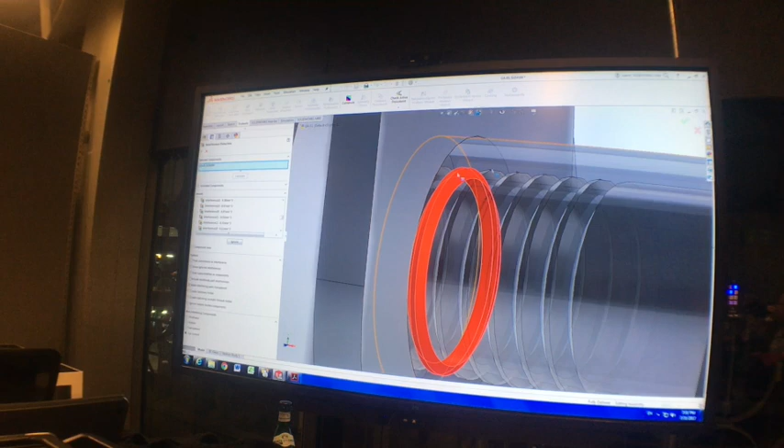This one here is between part 6 and part 8. What you might find is there are a lot that are very similar, and that could be because we have a thread on our nuts and bolts. Typically those threads, if we do a section view, you can see that thread here is between the nut and bolt - they're intersecting. That's perfectly fine, that's normal. What's not normal is we can see here in our bush, that's interfering - that's an issue we need to rectify.

Back to the interference detection, there's an option here to create a fasteners folder. You should check that, and then anything in this fasteners folder, you can press ignore, so it won't pop up with those. So now I'm just down to 2 main interferences - one here between part 1 and part 2, and another here between parts 1 and part 4, all up the top here. So I press the tick, that's just to help me identify where those issues are.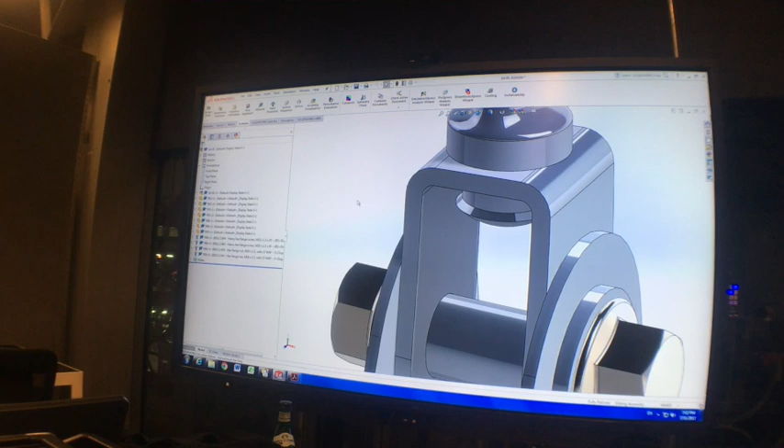So the first one, part 1 and part 4, let's have a look at that. I'm just going to make this transparent. You can see here this hole on the inside, it's too small. Assuming my size of the pivot pin is correct, I'm going to edit this one. Click on that hole, and you can see that hole's only 9, whereas the pivot pin is 10, so I need to make this bigger. I'm going to increase that to 10.2. You can see now that's going to create some clearance, and that should be okay.

So when I do the interference detection again, calculate, you can see that one's gone, and now I'm left with just this one here. For this one, which is in the washer, it's actually part of the sub-assembly. Now I can edit it here, or I can edit it in the sub-assembly, it doesn't make a difference. I'm going to edit this part 2, and I'm going to do a section view just to try and work out what's going on.

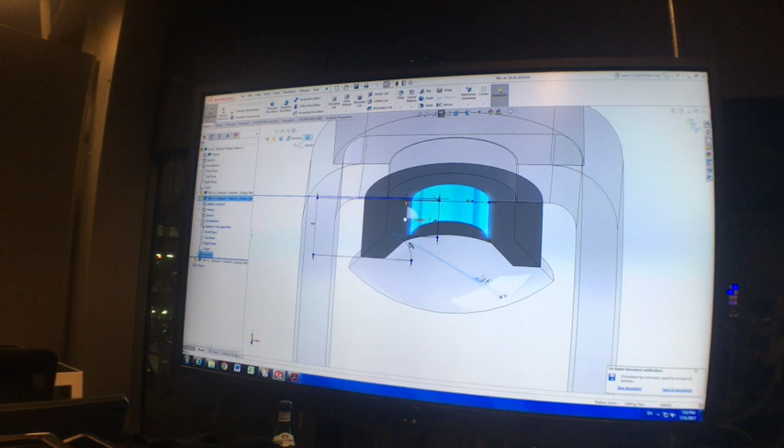You can see that the washer isn't big enough - the hole in the washer isn't big enough. And my dimensions, I haven't updated my dimensions yet. So where I have that 14 diameter, that should be 18. And then the hole size, again, needs to have enough clearance for that pivot pin, 10.2.

Now that's a lot better, but on the section view, I can still see there's interference there. If I turn this off, do the interference detection, you can see I've got some interference on these two corners. This is where some people have picked it up already - this now has a fillet on those edges, we're able to add that fillet on.

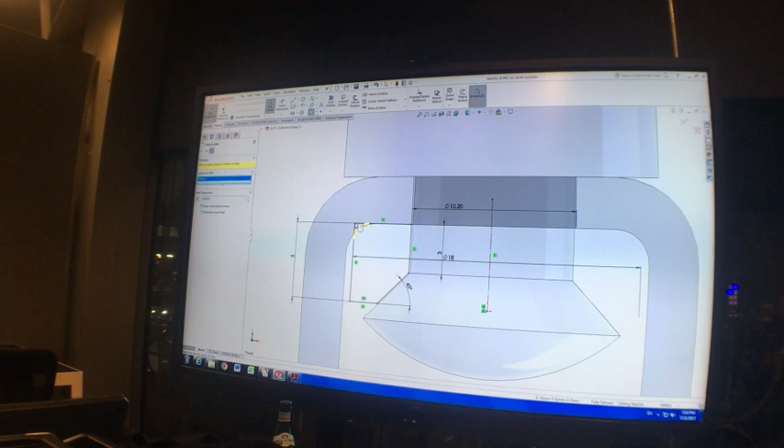So the way to add that fillet, we're actually going to edit the sketch of the revolve, instead of adding a new fillet feature - we can just edit the sketch. When you're editing a sketch, you can now see in the assembly where the other parts are. We're going to add a sketch fillet. So I go sketch fillet, put a size in, 1mm, select that curve, and OK. Now that's still too small, but what I can do is just bump up that number to 2, and then I can see that size is going to suit my assembly and my other parts.

Looking at everything else, assuming everything's the correct dimensions, the clearance on the other parts looks pretty good as well. What you may have found, depending on what number you had here, 2.5 or 3.5, is that there may have been some interference here, in which case you need to change that number and dimension as well. But overall that looks pretty good. So I'm going to accept the sketch, get out of edit component, do an interference detection again. All clear - can save that.

And now back in my general assembly, just do one more. Everything's clear. So I now know I'm good for interference across my parts.

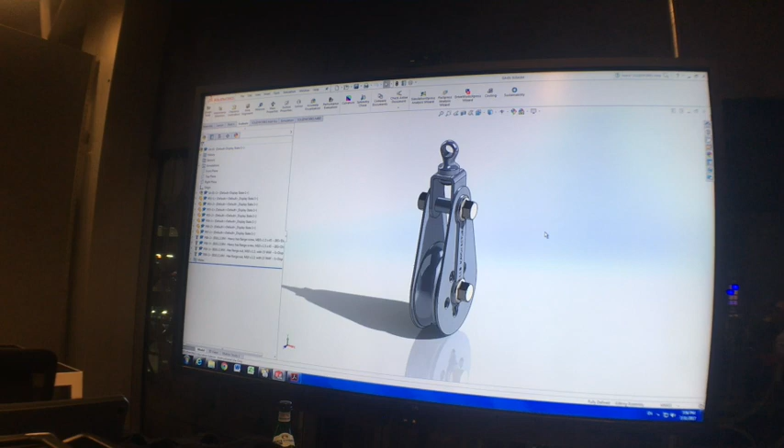Question? Yep. The fillet as a feature rather than you edit the sketch - why would I not use the fillet as a feature?

You can do either. In this project, I'd like you to have a go at editing a sketch in the assembly, and that's the reason. Okay, but in reality, you can do either way and it will be fine.

All right, any other questions on assemblies, issues? When I go back to the evaluate again, nothing's coming up, and it still says 16.

Yeah, those ignored ones are in the fasteners folder. To show them again, you need to press the button here that says show ignored interferences, and it will show you any that you've ignored.

Sometimes you can have interferences which are not fasteners, but you know that they're acceptable, so you can ignore them anyway. Click ignore, and that way next time you do the interference detection, it won't pop up again and again.

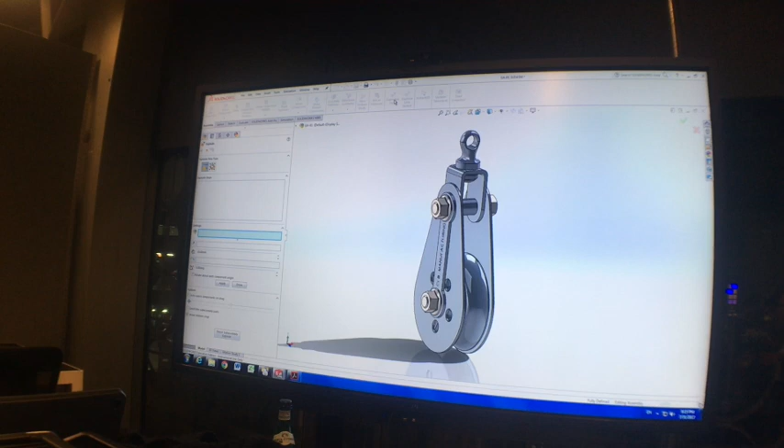So very simple how it works. Press the exploded view, and it opens up this properties manager. You select a part, and when you select that part, it'll bring up these arrows, and to explode it, you click an arrow and you drag, and that's it, and it adds a step.

Now what you want to do is work out the order in which you want to do the parts, and you can do multiple parts at once. If you want to click multiple parts, you just select them, and then click the arrows and you can drag. Now each time you add a step, that adds it here on the left.

Explode step 1, 2, 3. You can reorder the steps by clicking and dragging them, and you can delete them. You can also undo. So I'm going to undo and just go back to the start.

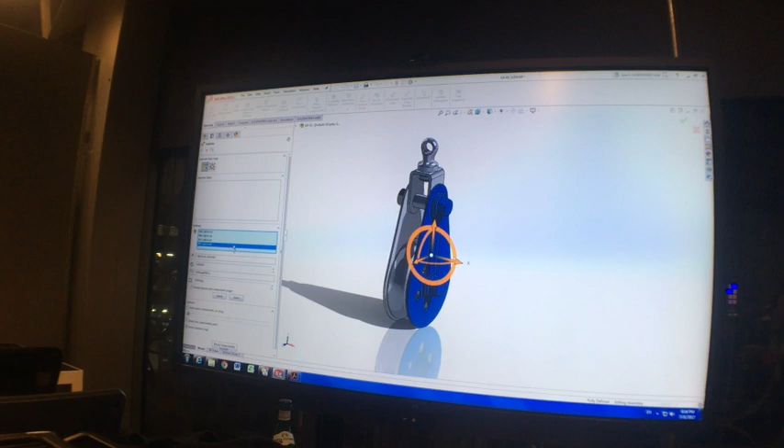So if you think about the way that this would be assembled in reality, we would have first these bolts, side plate, reinforcing plate, side plate, probably even the bushes all come off at once. But we'll keep it pretty easy for now.

So I'll do the bolts. Now I want to bring these off at the same time, I want to keep them all coming out to the side. So I'm going to select these two again in the side plate or reinforcing plate, then the side plate, then the bush.

Okay, then I'll do the other side. You'll see the difference in a second. And this is not necessarily the perfect way to do it either.

Alright, so that's exploded all the way out, both sides. The sub-assembly, I'm going to come back to that. So I'm just going to press the tick. Now that's an exploded view.

When you save your file, it's saved within the file. You don't have to save a separate exploded view file. To collapse it, right click on the name of your assembly at the top here and press collapse. To explode again, right click, explode.

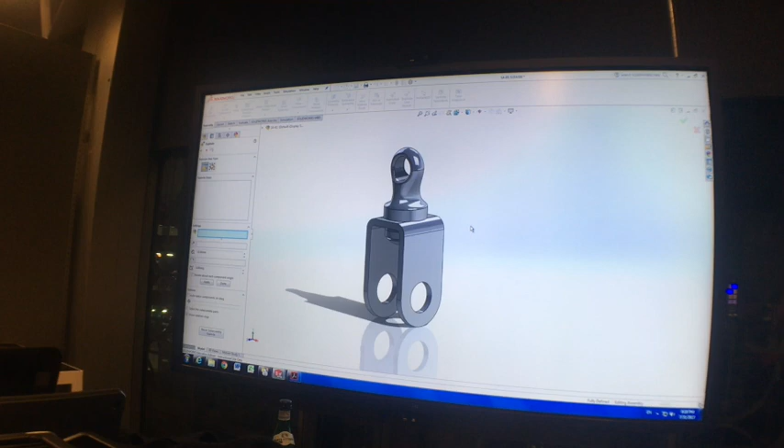Now I'm going to collapse it. I'm going to go to the sub-assembly just to do something in there. I'm going to do the same thing with an exploded view. This one's going to be very simple, just going to go up and down here. That's it.

Collapse. I'm going to save that. Close.

Now, when you want to edit your exploded view, don't press the exploded view button, because every time you press this, it adds a new exploded view. To edit the existing one, you need to click on the configuration manager above your feature tree, press this drop down, and you can see exploded view 1 there. Right click that to edit the feature, and now I'm in edit mode again.

Now the reason I did that little sub-assembly explode is for this. I can select this sub-assembly and select it as a whole part, so I can move that all together. If I want to move the individual parts, I have to tick this box down here, select the sub-assembly parts, and then I can select them individually.

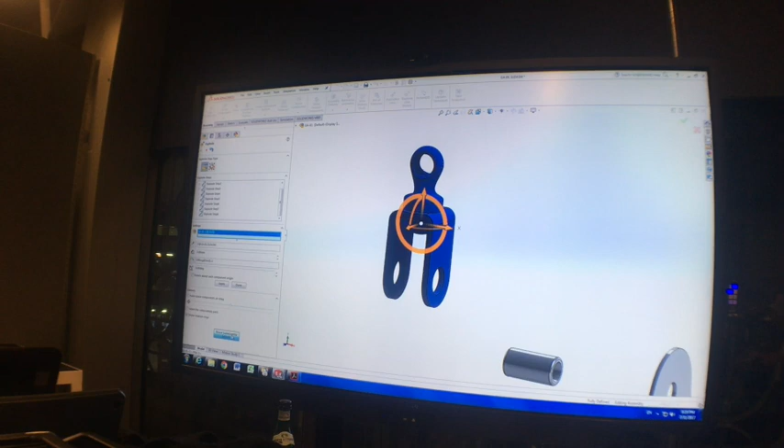But the better way of doing it is to select that sub-assembly and press reuse sub-assembly explode. So you already create the exploded view in the sub-assembly, and in your general assembly now, I don't need to recreate it. I can just hit that button and it's going to create that for me.

Some of the things I sort of skipped over here, and the reason I skip over them is because in all the years I've done exploded views, I very rarely edit any of these settings. But what they are is, if I double click on explode step 1, it shows me what parts are involved there. If I want to add a part to that step, I can select it here and press apply, and it will include it in that step. Or I can delete it and press apply, and it will remove it.

The direction here, the arrow, you can change the direction, but once you've created the step, you can't actually go up or down or across. You can only go in one direction per step.

The other thing you can do, press done, is explode it at an angle. So if I wanted to explode this part at an angle on this line, I can select that line and then go in that direction. So if you want to go at a certain angle, that's the way you can do that.

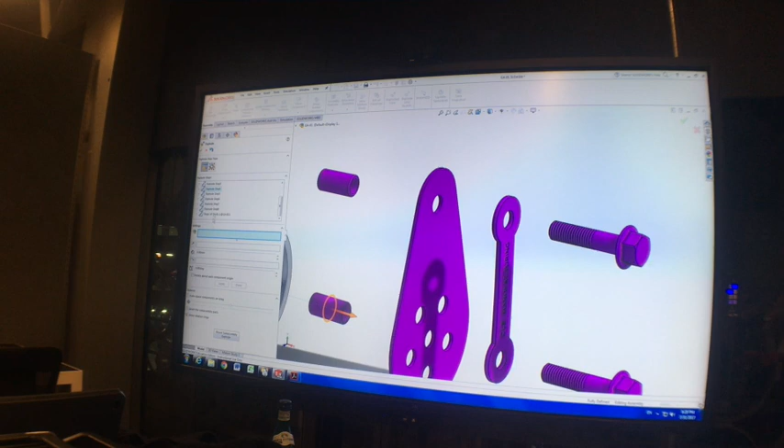The other information here is the measurement. So if you wanted to explode each step 100 millimeters, you could do it by putting in an exact measurement here. There's a few other tools in there, and there's a radial explode here. I'm not going to worry about going over those tonight, you can have a look at those in your own time. But when you're done, that's the exploded view.

So I'd like you to have that in your file before our submissions.

To actually see how it works, you can press Animate Explode, and it'll show you the movement of parts. You can press Reciprocate and play, and you can see it all goes together and pulls apart.

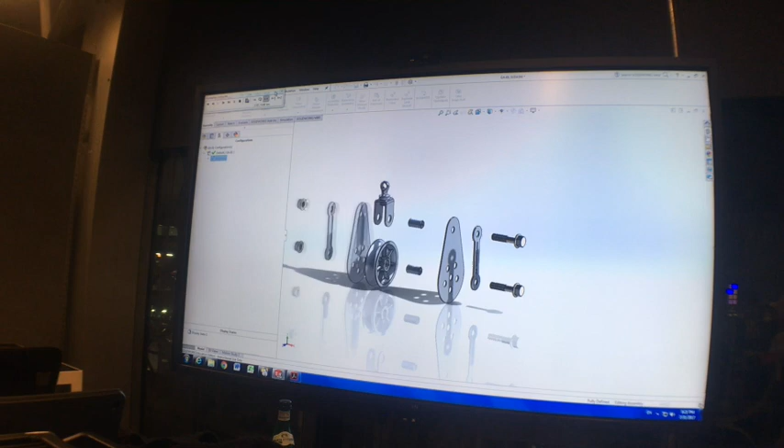Alright, so play around with that tool, try multiple exploded views if you want. You can always right click on them and delete them if you're not happy with them. But these are just some of the cool tools to play with. When you get into more advanced stuff, you can actually create animations from this. So you create all your parts, you create your assembly, you create your exploded view, and then you can do a motion study down the bottom of the screen, and render out the motion study. So you can have a 3D exploded view showing, communicating how your object goes together. There's a lot of different ways these tools can be used, but that's the basics for you. Any questions on that stuff?

Is there a way to evenly space it rather than just... I think the laughter here is because I explained that already. Oh really? Sorry, that's alright. I was laughing at... No? It was not very... Okay.

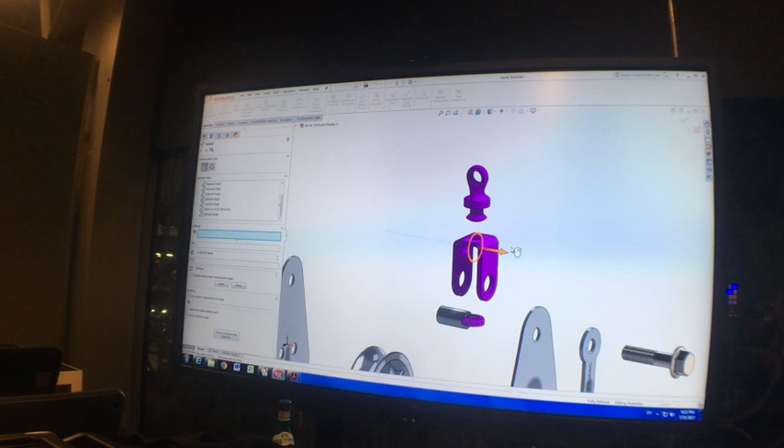It's all good. So there's the dimensions here. When you do your step, let's say this one, I want to move it to the side. So once I've moved it, I click on that step, and I can go to the dimensions, and I can put in a number, and it will move it exactly that amount once I press apply. But typically it's very rare that you need it to be perfect. If you're really pedantic about it, you can, but there's no real need, it's more a visual thing.

In Project 2, the task will be to get these spaced out at a certain angle. None of these angles show it right now, but it might be an angle like this that I'll set, and you need to space them all out so nothing's overlapping. But that's Project 2, and we'll get to that then.

Alright, anything else on these? No questions, it's good. Alright.